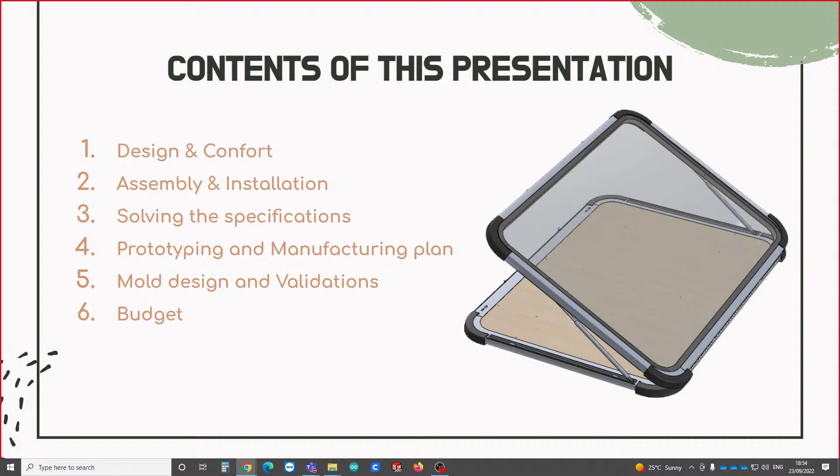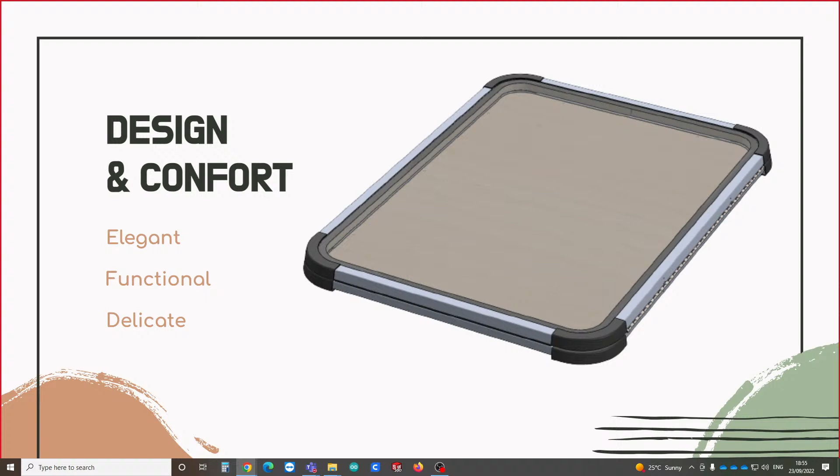Hello, our product is ideal for roof racks. It is adaptable to any roof rack as a standard anchorage has been used to allow it. As you can see, it has an elegant, functional and delicate design. When closed, it has the minimum height possible. It is a place where you can spend the night in unique getaways, enjoying the sky and the stars with your family or friends, wherever you want. It allows opening so that the breeze can be felt without allowing insects to enter, to get a safe rest in an extraordinary place.

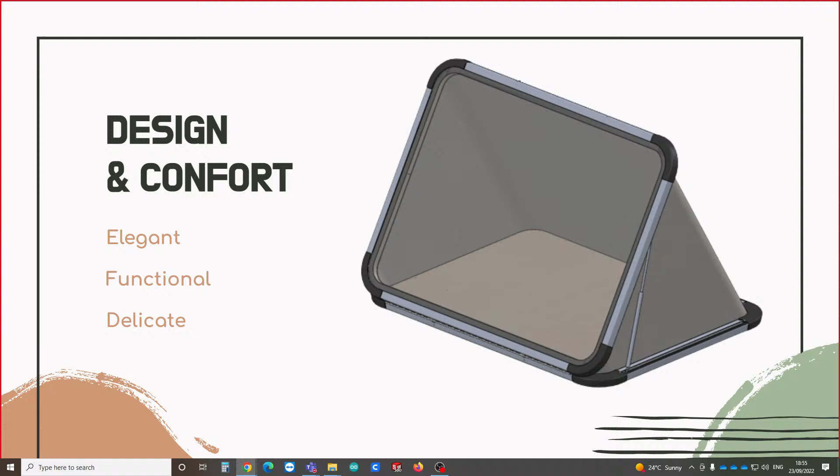It is designed mostly with aluminium to make it a lightweight product, with only 73 kilograms of weight, fabric to enable its small size and lightweight, and plastic for the corners. It also has water seals that close the product in its entirety to prevent the entry of external agents such as rain or anything which could damage the tent. We have made two identical frames to reduce costs and lead to mass production. It's a simple but decisive product that will accompany you in all your nomadic life. And now I will pass it to Sergio.

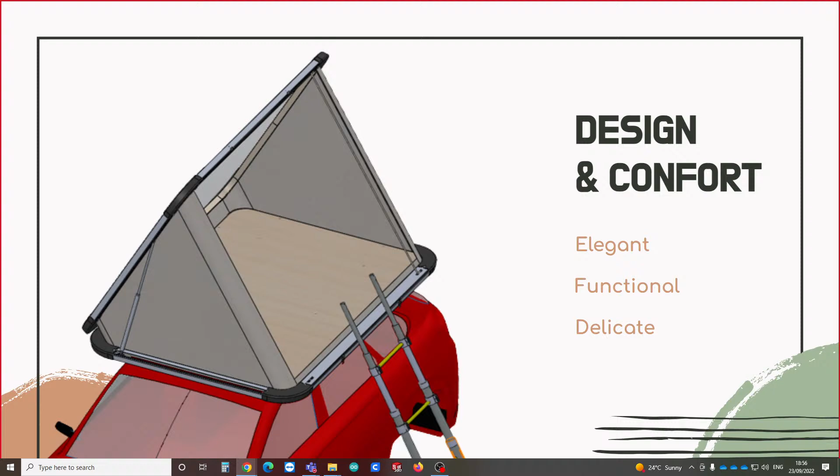Hi, I'm Sergio, and I'm going to present the assembly and installation. We want to present a design that is compact and conveys security to the user. Our product has been designed to be easy to install and easy to assemble.

The first level of assembly will be as follows. The structural bars are attached to the floor panel by screw and nut set. For installation on the car rack, the adjustable support must be attached to the bar before welding.

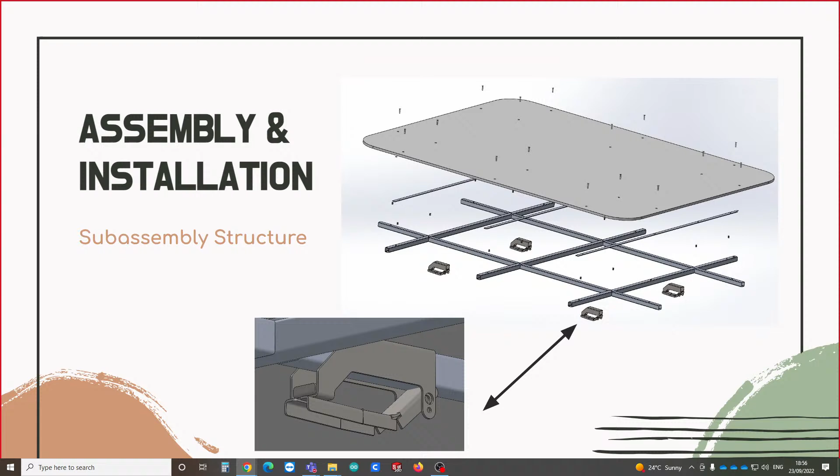The next step will be to attach the 4-folded sheet metal frame to the previous subassembly by welding. Once the metal frame is installed, the 4 plastic corners are installed with screw and nuts. For insulation, the weather strips are sealed to the metal frame. The plywood carpet is sealed to the floor panel by polyurethane foam.

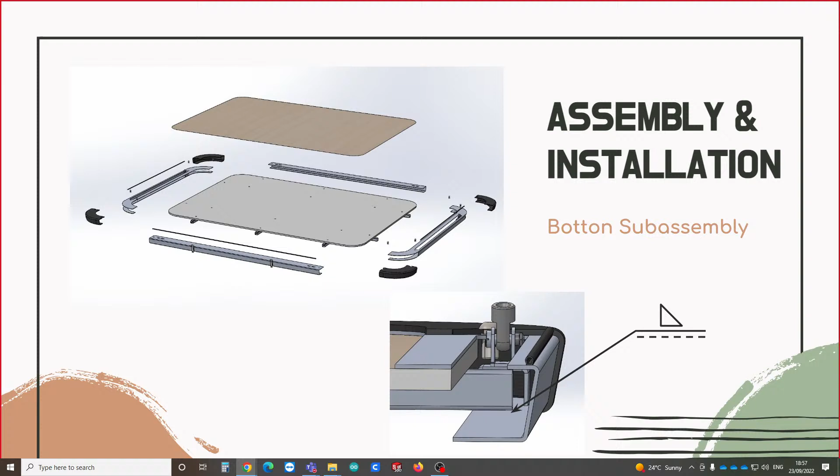The subassembly metal frame ceiling is easy to assemble. The screen is sealed with polyurethane foam to the 4 metal frames. The spring-based supports are welded to the frame on the inside.

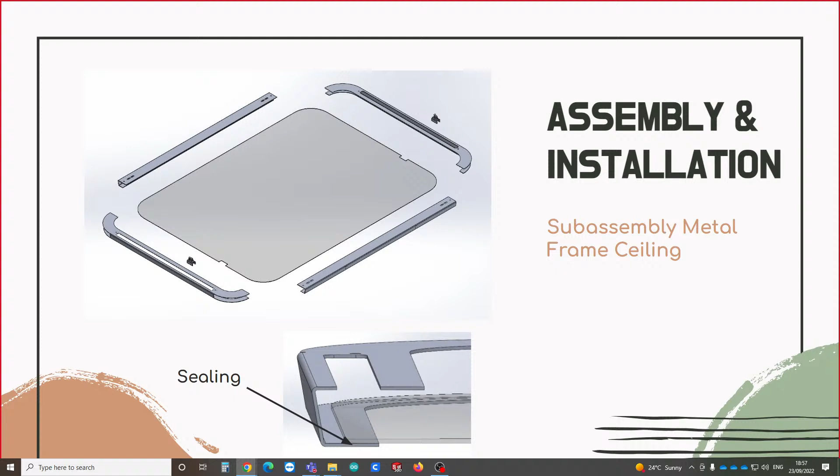4 plastic corners with screw and nuts are attached to the previous subassembly. On the other hand, polyurethane foam is inserted into the hole of the frame, and the weather strips are sealed to their surface for the insulation of the living space. 2 plywood sheets are used to seal the inside of the window.

To connect the top and bottom subassembly, a hinge is welded to both frames, and 2 gas springs are installed in the pre-welded bases.

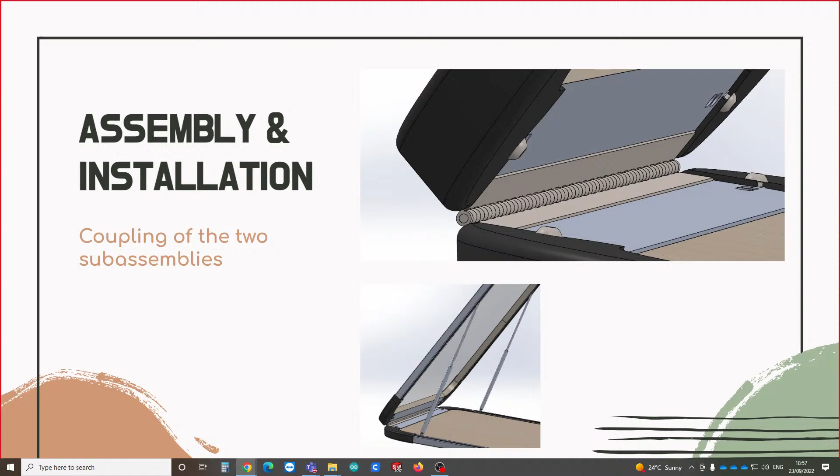Regarding the installation to the car, our design offers a great adjustment to the different roof racks, thanks to the easy manipulation of the support. And now Jose is going to continue with the presentation.

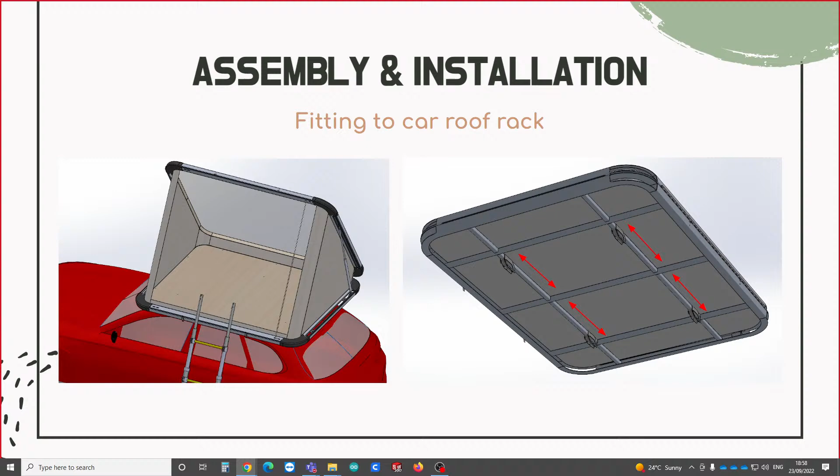Hi, my name is Jose Angel. In this section, we have to stop to differentiate between these 2 aspects. In fact, both are relevant for the industrialization of any product.

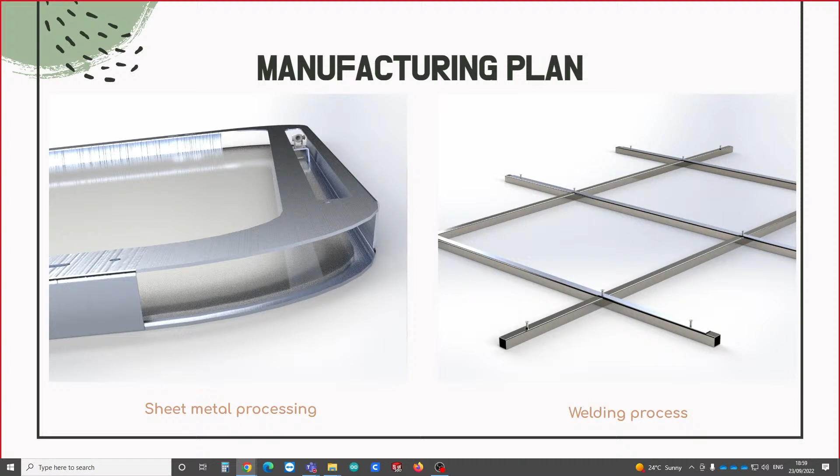Talking about the manufacturing plan, we have to point out that the main limitation of the project was the weight in running order, which had to be less than 75 kilograms. So the material we had to use was very light. In order to provide this material with the necessary robustness, we have firstly used manufacturing processes such as sheet metal, weldments, and on the other hand, assemblies that provide perfect rigidity and safety to each element.

Of the rest of the part design, we can highlight the parts manufactured by injection molding process, and the part that had been designed for CNC cutting.

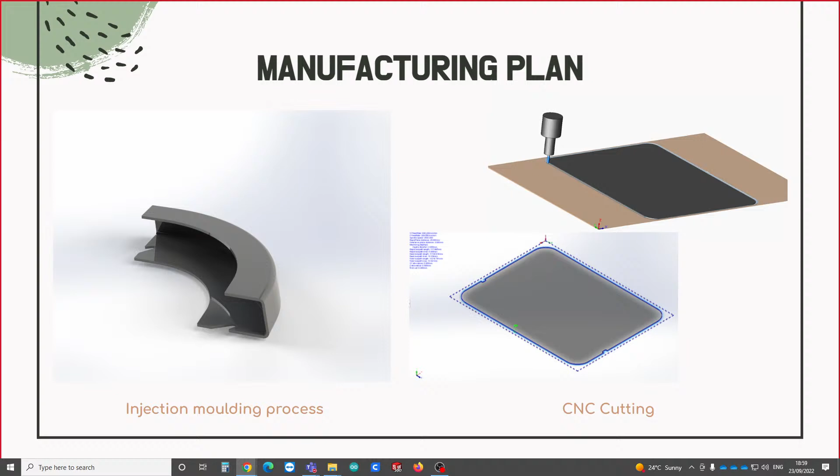We were required to produce a fully functional prototype, and this was a determining factor in the choice of scale and the processes used to manufacture it. As a result, we have chosen the scale 1:5, so that is as close as possible to the final product.

Thanks to redesign of the parts, we have achieved the right thickness of the parts and a good coupling between them. For all these reasons, we believe that we have passed the target of the total functionality of the prototype.

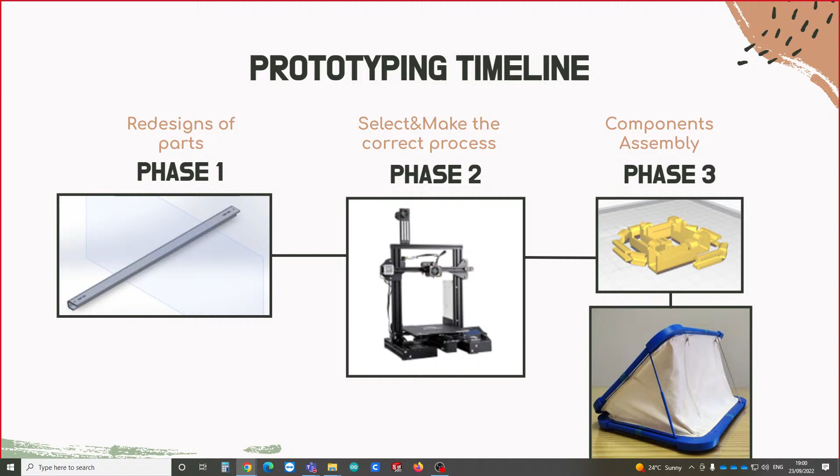Regarding our plastic part, we decided it has to be small and simple in order to have a mold that does not have huge dimensions. Its thickness is 4.5 millimeters and it is made of PP copolymer, as well as the car's bumper.

We can see a short video where the injection plastic filled perfectly, and there is no problem with the design. There is another image here where we can see some spots, some dots, where there are some air entrapments, but we expect that because there are some curves that we cannot avoid.

But it is really easy to design, to make it affordable. I think that's pretty much it for this part.

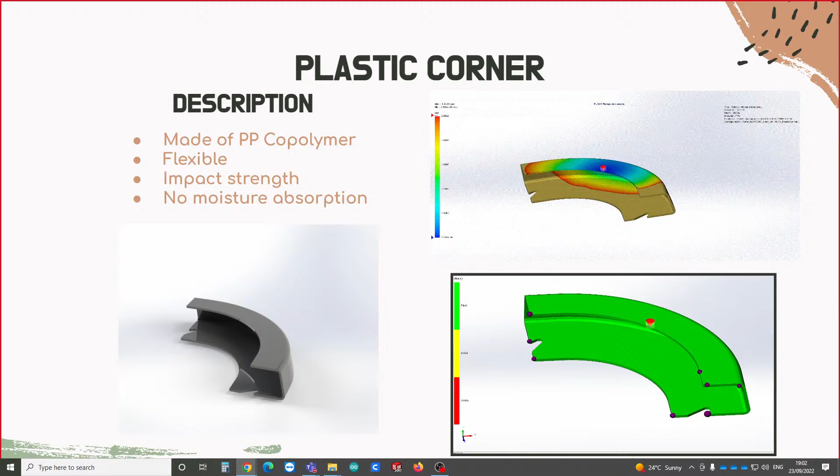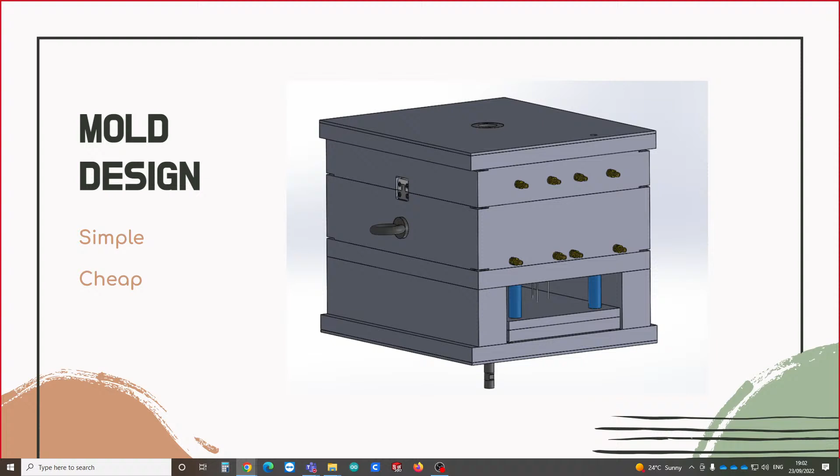We look for a simple and cheap mold, so we focus on the plastic part design, minimizing undercuts to avoid side action slides. We choose a two-plate mold configuration with two cavities. We designed an ejector layout to eject the part easily, minimizing witness marks.

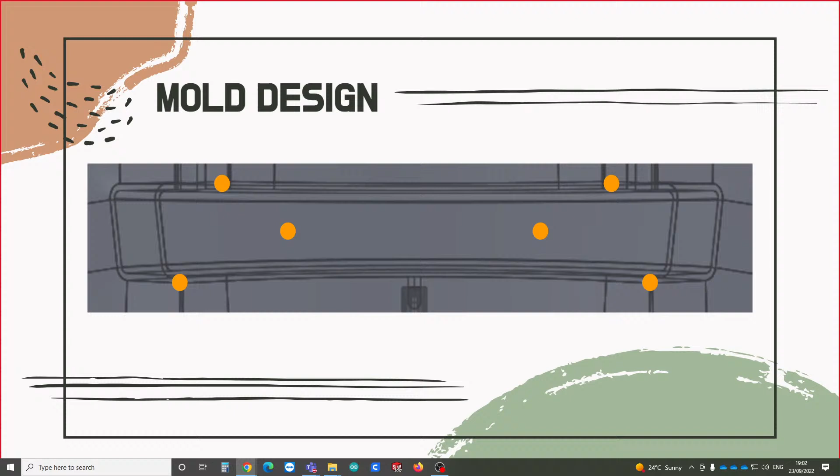For the injection gate, we designed naturally balanced and full rounded runners to provide the most efficient flow. Also, we use a standard tunnel gate to make curved tunnel runners.

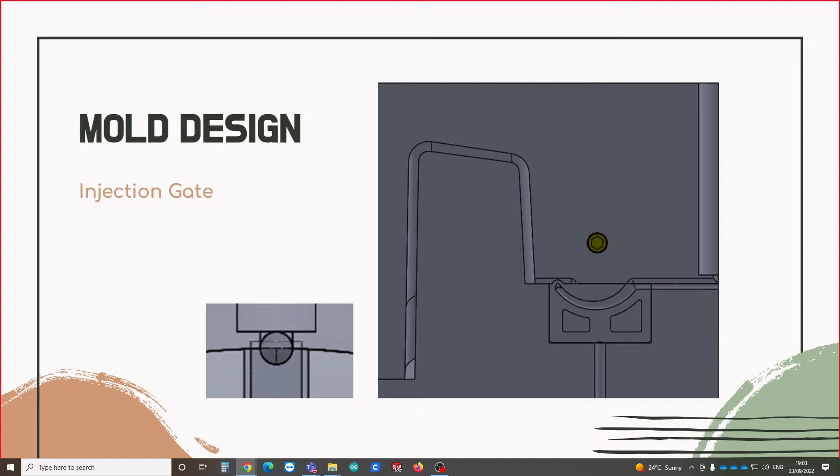Cooling lines are being arranged in multiple series to maintain a uniform coolant flow rate throughout the circuit.

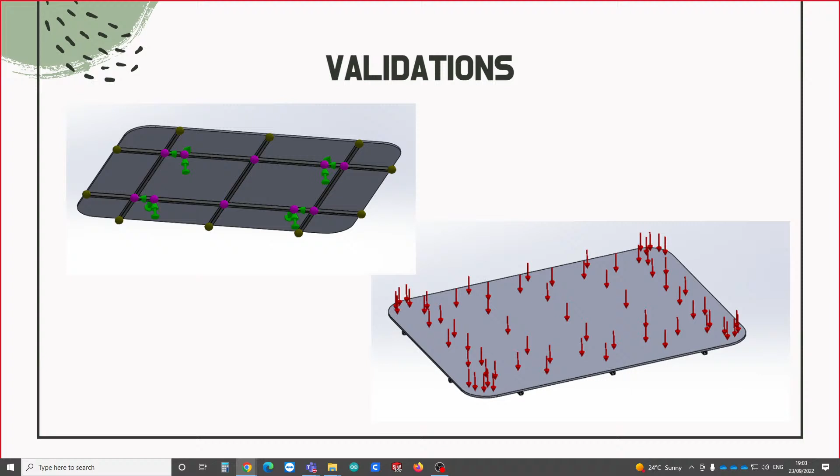To check the structure, we made a linear static analysis to calculate displacement, stress, and reaction forces. The members of the frames are being treated as beams, and the base is treated as solid. Anchors are defined as fixed geometry. Restraints and a force of 2,000 newtons has been defined as external load on the base panel. The displacement is low and the stress result is under the yield point.

And also, as we applied some DFM techniques during the design process, we have also been able to keep down the manufacturing costs.

Moreover, as soon as the customer wants to scale up the process, we have also quoted for a first batch of 250 units, which is a great number to start testing the market with. And we have calculated the unit price by applying only a 20% profit, which is a very basic price.

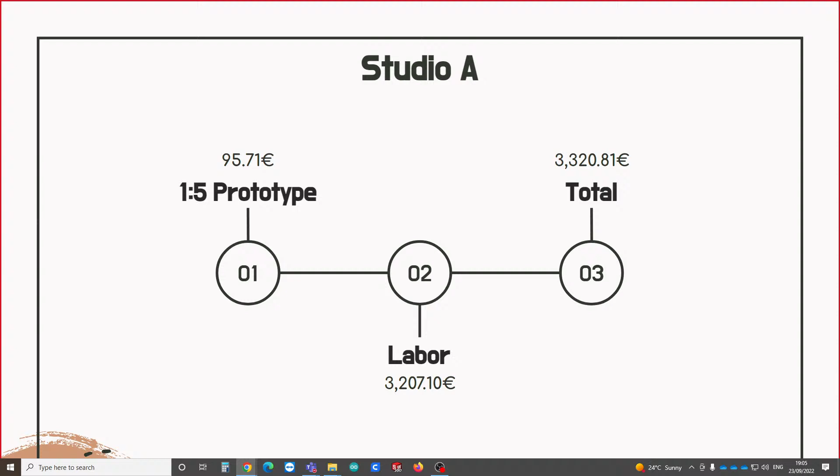And obviously, if you see the 2,880 euros that one unit would cost, there is a lot of room for also scaling up the profit. Moreover, as our take as a studio, we have been able to keep down the cost of the 1-to-5 scale prototype, and also, of course, accounting for the labor hours and so on, our total take would be 3,320 euros.

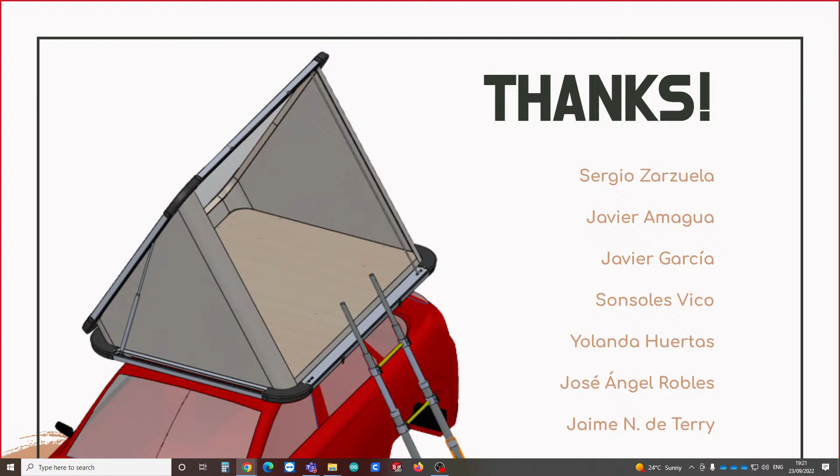Un gain, un profit de 20%, que es un profit base para sacarle rentabilidad, pero con ese precio hay posibilidad de escalar, de incrementar ese porcentaje, más del 20%. Vale, pero este es el precio de fabricación. Bueno, ese es el precio de venta, porque ese precio incluye el take, el 20%, y también el IVA. Ahí estaría el precio. O sea, este es el PVP, el precio de venta al público.

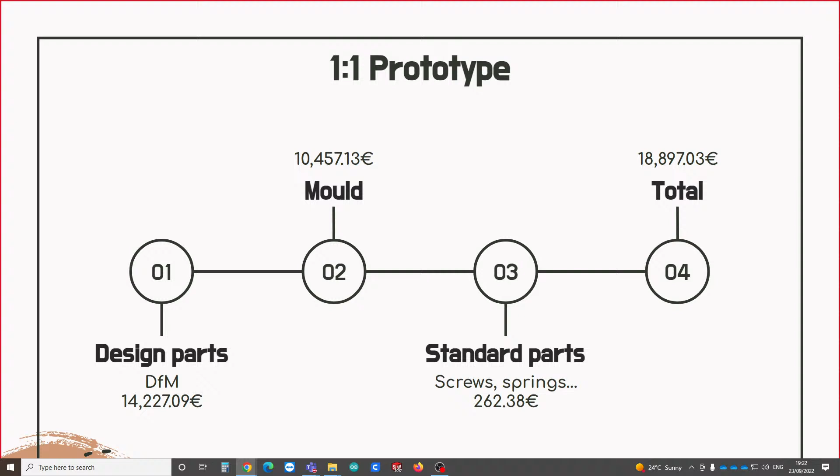Vale, ¿y el precio de fabricación cuál sería por unidad? El precio de fabricación por unidad, el del prototipo no es el precio de fabricación por unidad, evidentemente. Luego se reduce bastante, al industrial. Aquí está el precio de industrialización por 250 unidades, costeando. Entonces, si le quitas ese 20% que dice Jaime, y el IVA, te dará el precio de coste de lo que te cuesta a ti realmente fabricarlo.

Hemos hecho la proyección de la industrialización del modelo a esas 250 unidades. Evidentemente, si industrializas y haces una tirada de 500, el coste bajará y podrás venderlo más barato, según sea el deseo de la inversión. Pero el precio de fabricación, incluyendo las piezas estándar, serían 1.820 euros. Vale, pues gracias, chicos.

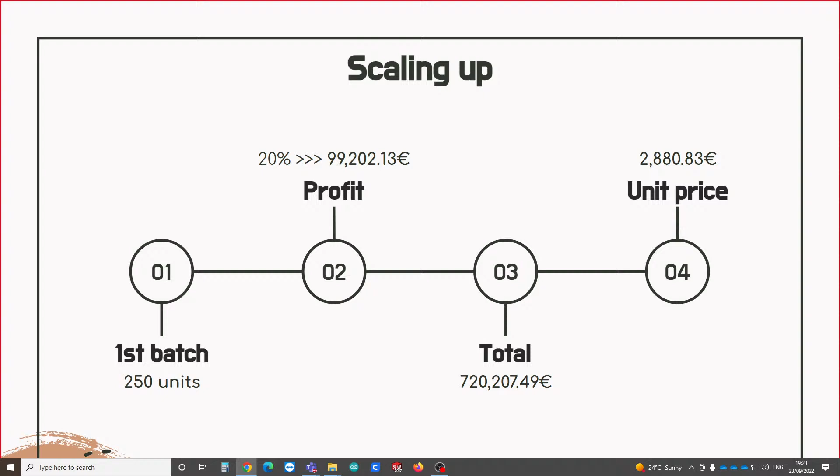Usa Google Drive. ¿Pendrive o Google Drive?

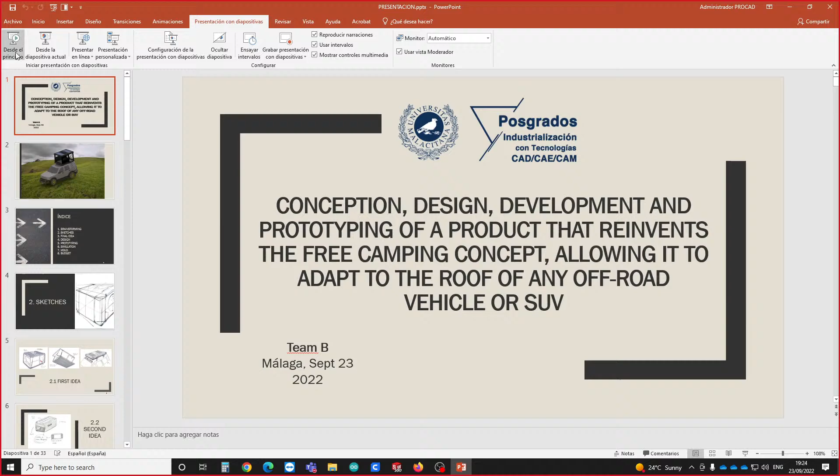Vale, sí. Nos verás seguramente, ahora me verás a mí. Sí, he encontrado, pero no veo el streaming en directo. ¿No se ve en directo? Ya se ha encontrado el canal, ¿no? Sí, You Make It, Fab Lab. Vale, está como en espera, espérate.

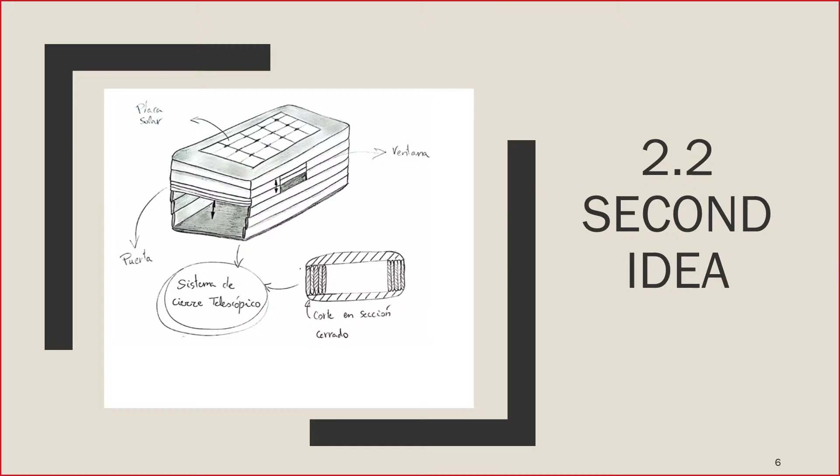The second idea has a telescopic opening system. For this system, the wall is formed by approximately 10 bands with the rectangular shape of the piece and a height of 12 centimeters, which are joined together. We discarded the second idea because it was more difficult to manufacture than the first idea.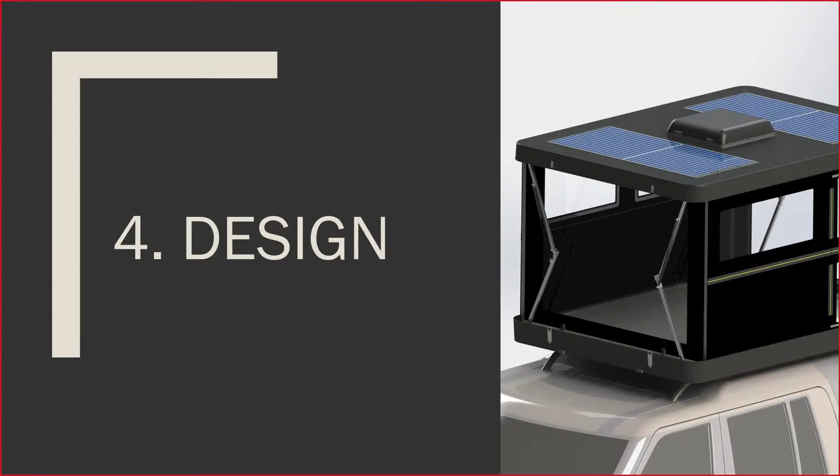This is the final idea, the render we can see here. And now we are going to explain the different parts.

Hello, my name is Daniel, and I'm going to explain the design that we chose, which only weighs 70 kilos. About the walls, they are made of 3mm thick carbon fiber panels joined together with carbon fiber hinges, which are attached to these panels by epoxy resin.

The openings for the windows are made by CNC, so it's very easy for manufacturing, and they are covered by the same system as conventional tents: waterproof fabric with a plastic zip to allow the user to open and close the windows.

About the rear and front walls, they are made of the same materials and they are attached to the ceiling by hinges. To ensure that the walls will remain in place when being inside, we have placed 2 clip fasteners that attach to the base of the tent.

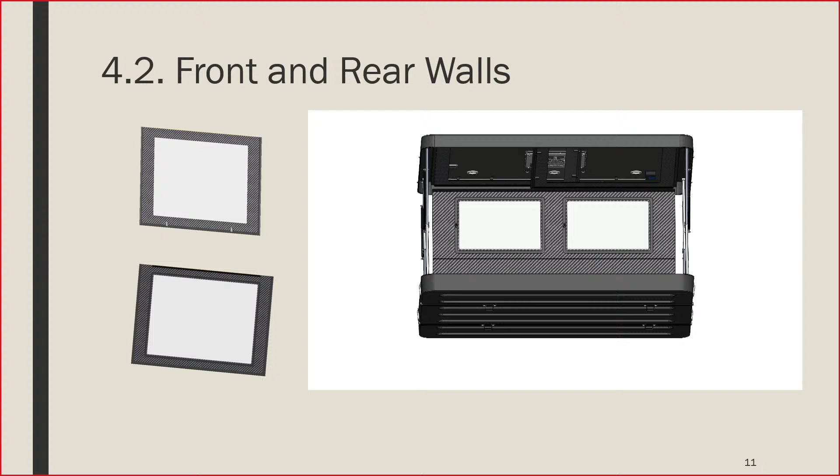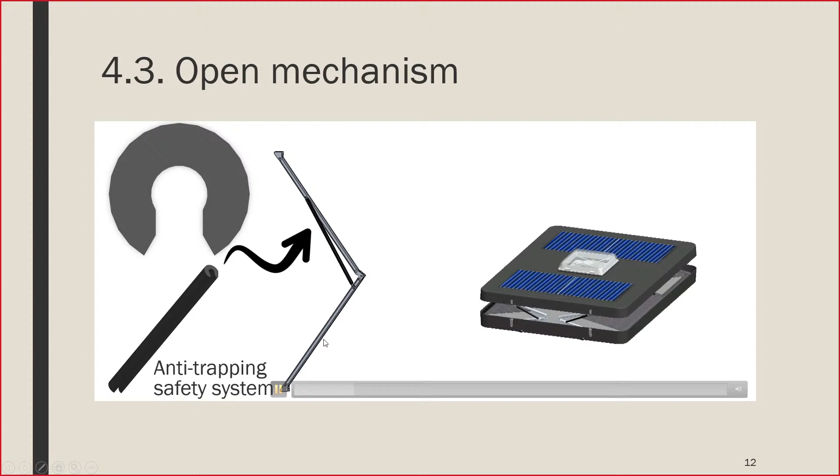About the opening mechanism, it consists of 2 aluminum beams with a gas damper to ease the opening of the tent. And to ensure security inside the tent, we have designed this injected piece that is placed right here, and it prevents the tent from closing when being inside.

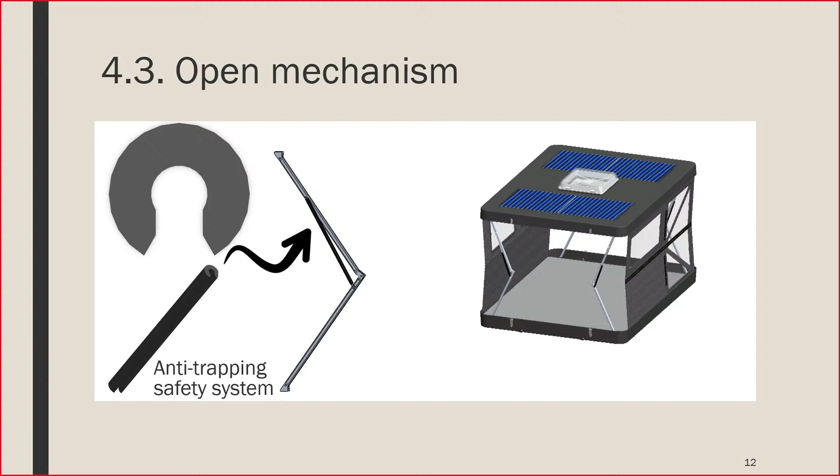I'm going to pass to Jose.

Hi, my name is Jose. I'm going to explain the final design of the roof. I can explain it in 2 parts, the interior and the exterior area.

In the exterior area, it's a skylight that is connected with the interior. This facilitates the entry of air and light.

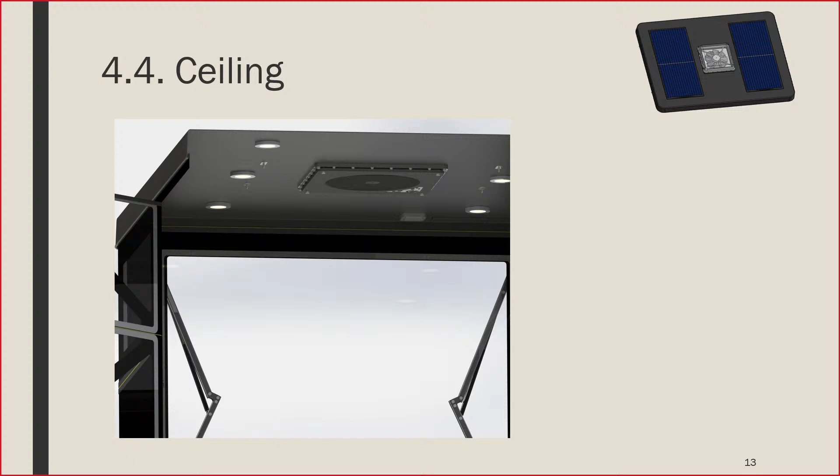The 2 solar panels will help reduce the electrical consumption that the car should provide for the LED light. The solar panels are operated by their own system. The energy is carried through an inside cable, and a small transformer will turn on/off the LED lights. An on-off button will perform the operation. I put a USB design on the button here to charge the mobile phone.

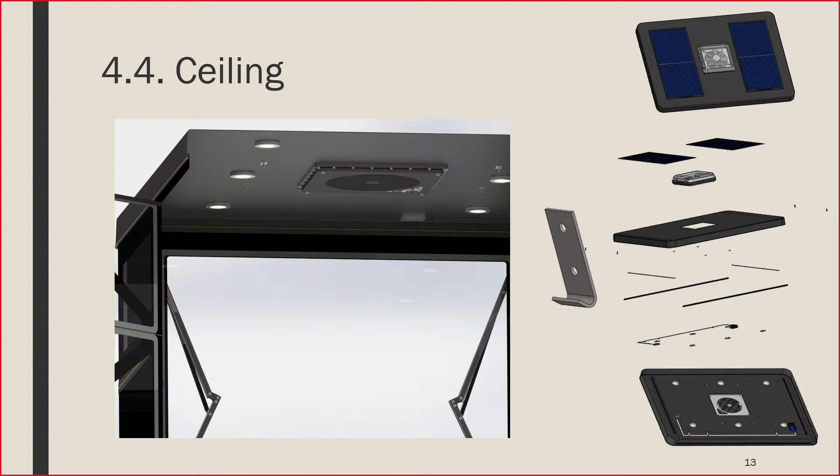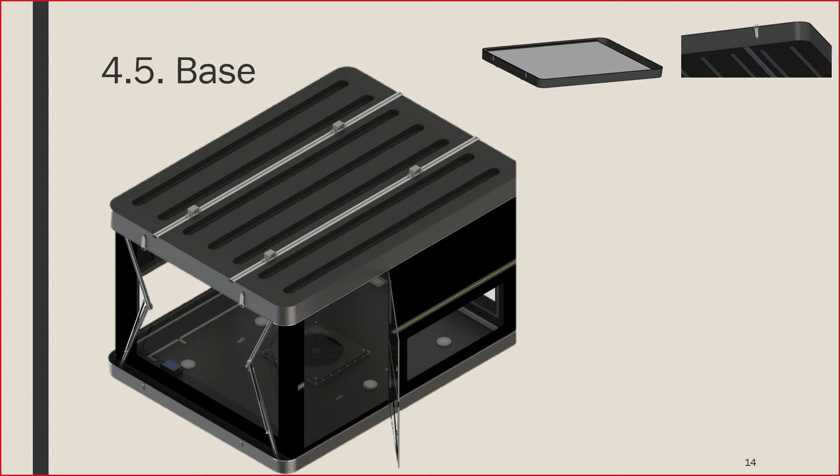Good afternoon, my name is Carlos and I'm going to talk about our prototype. Our prototype has been produced entirely with 3D printed parts. This is a 1/10 scale model.

By doing this, we can design all the pieces and produce them in our 3D printer beds, and that's how we reach a reliable replica. However, the wall thickness is wider compared to the 1:1 model. That would be so thin that the printer couldn't reach to manufacture it. It would be like a paper sheet.

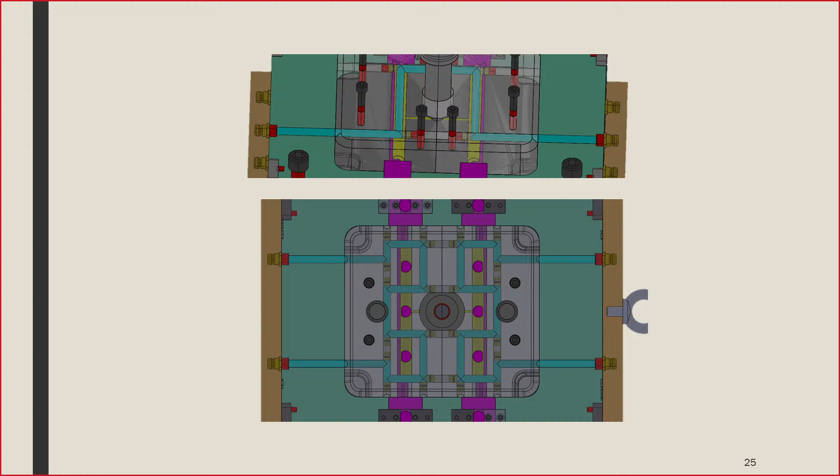The cooling is in zigzag form in the core and cavity plates. The entrance and exit of water are lateral. Each piece needs 3 ejectors, 6 in total for the mold assembly. And in this mold assembly, there are other similar components, like centering rings, counter or cycle counters, or centerings.

Hi, I'm Elena, and I'm going to describe the budget of our project. First of all, we must specify that we have divided the budget into 3 categories.

First, the engineering budget. It refers to expenses generated by the engineer service, software license, computer equipment, and all machinery used. Of the latter, only 5% of the total price is taken into account since they aren't resources made for this project alone. The total of this budget amounts to this price.

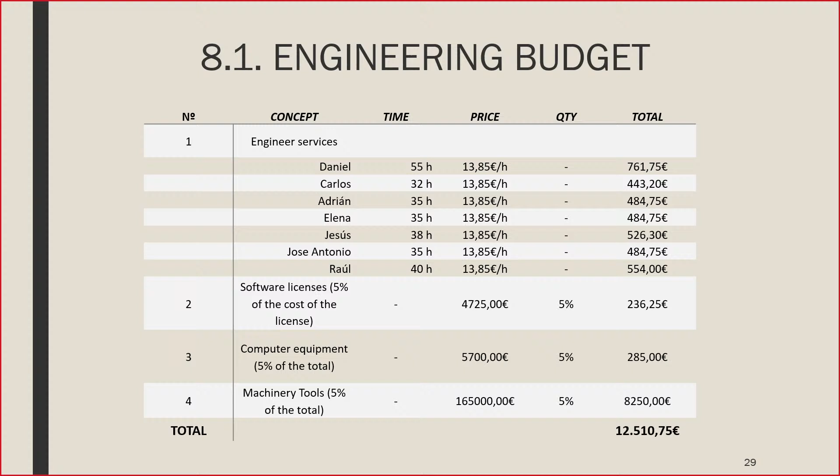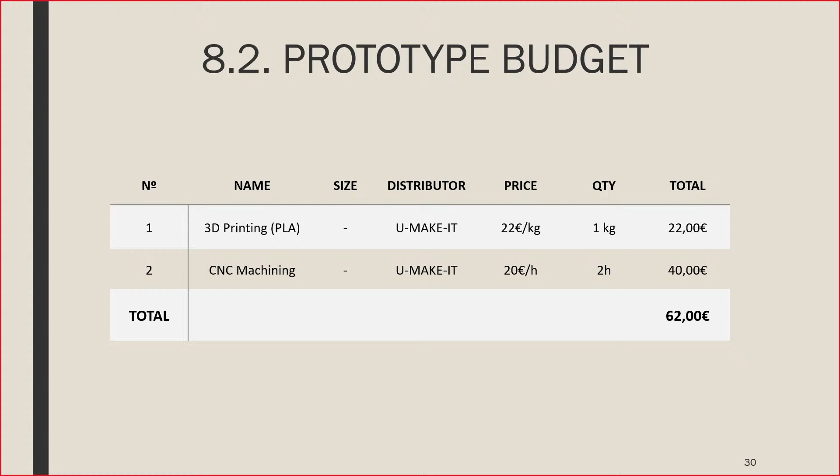Secondly, we have the prototype budget. This refers to the prototype that we are presenting today, and it only includes the 3D printing cost and the CNC cost. Finally, we have the estimated budget for the manufacture of a functional prototype.

For this budget, all the components used in the manufacturing have been taken into account. As we can see, the total price amounts to 7,500 euros approximately.

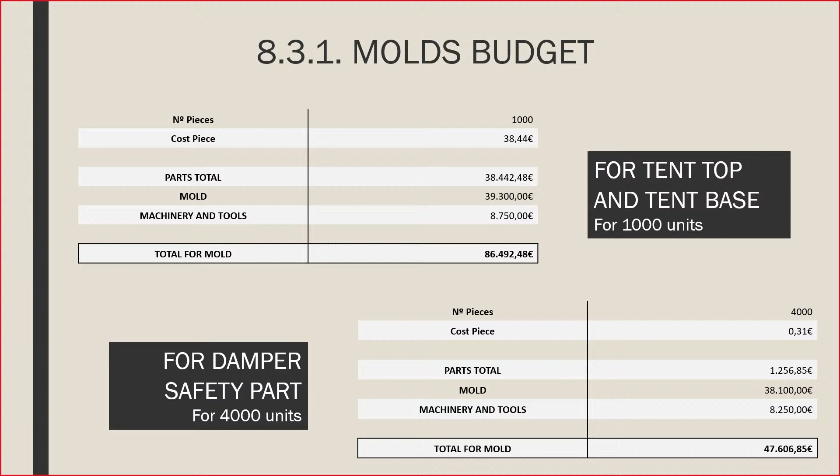On the other hand, the budget for the molds of the top cover, base, and damper safety part has been made separately because it will only be an initial investment. These are the prices for each of the molds, assuming production of 1,000 prototypes. And this has been all about the project budget. Thank you so much for your attention, and we hope you like it.

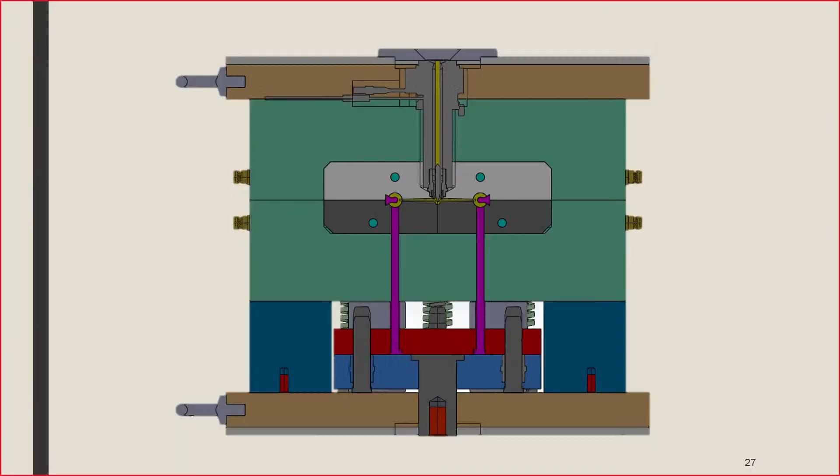Okay, I'm gonna start. It's the same question as the other group. The ladder part is included in the price. Where does it get stored? Inside the car, as the battery. This was one of the requirements of the customer.

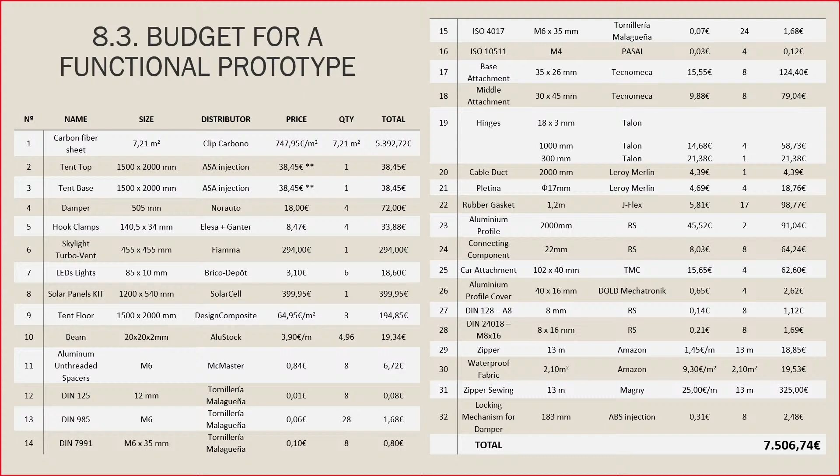And you need a mold to make it. I see in a picture in the first one of the presentation, 2 bars, 2 crossbars to put your tent over. No, 4.3. But you have the connectors too. You mean this mechanism? No, it's the bars. The crossbars are on the top of the car.

Before, you mean after? No, after. Near the beginning? No, yes, in the beginning, I think it's the first one. Maybe the sketches, or no? The sketches, this one, the third one. You have 2 crossbars over the roof.

Yes, it's necessary to put your product. If you look at any car, you need that standard rack to place anything. But there are some cars who have a place to put your product if you want, like Team B. Team A, sorry, they don't need something like that. Our model requires this type of rack.

Because it allows more flexibility. Yeah, you can see here. You can see it there. Then you don't need it? No, you just need a transversal bar or profile to attach it to.

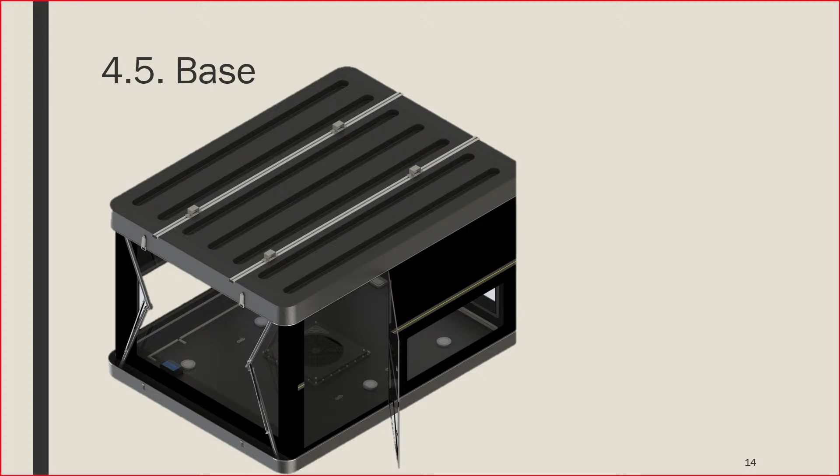And one of the first pictures you have there, the design is more rounded in front. Is this the final design that you're looking for? Not necessarily, like this one right here, the third. Yeah, this is like one of the first sketches. So, okay, the last one is this. This is the last, same.

Close it. What's the size of the base? 2 meters by 1.5.

So how many people can fit in there? It's like the usable space. It's like a king size bed.

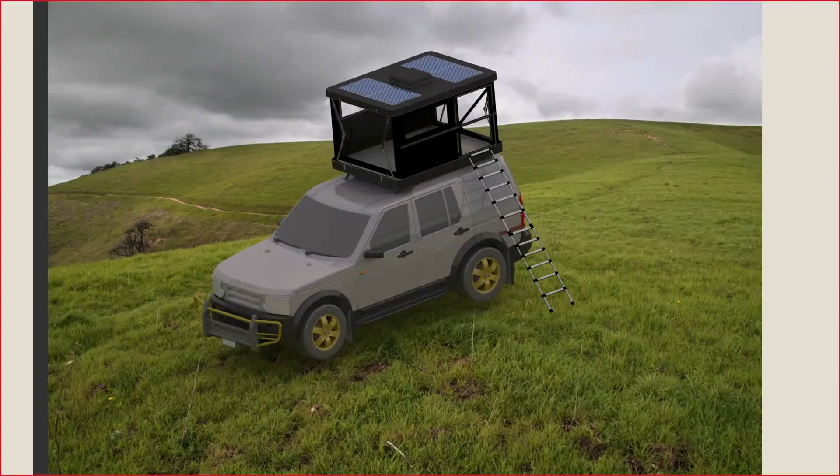Is there a mattress in there? Is there something like, the same question I asked them? Yeah, is there something? We have this base that is placed, I will show you guys. Because this is made of plastic, it has these cavities to strengthen the structure. So you cannot see the cavities, so we place 2 coats of foam.

That can be included in the prices. Yes, the prototype cannot be, it needs to be with the final version. My question is, this final price of 7,500, does that include the foam as well, or is that separate? Someone has to think about it. The foam wasn't included because the customer didn't want it. So the customer prefers to leave all the weight to the structural part and leave the comfort to something like a normal sleeping bag, for example.

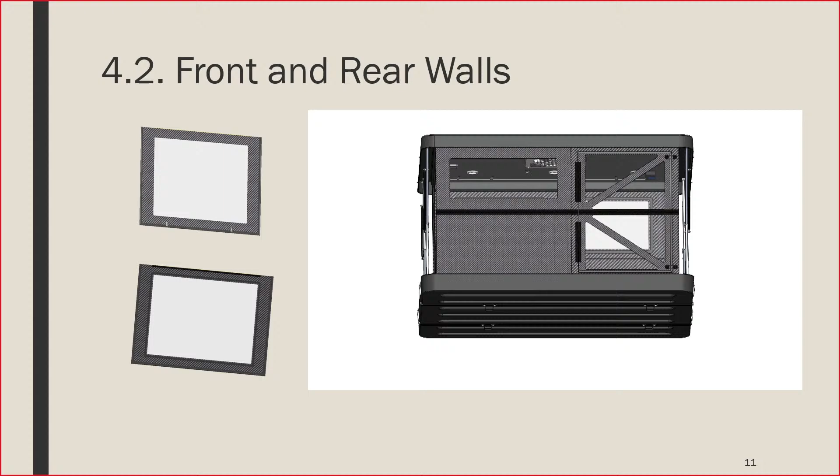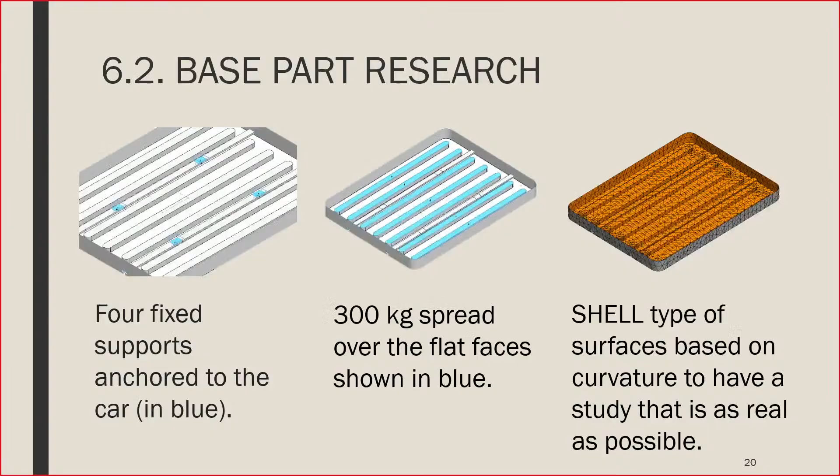My last question is about the simulation part. You mentioned in the base part research that some parts have problems because they show red. Is there a problem with that red part breaking? No, because in the safety simulation it's okay.

The safety factor is about 1.8. The most unfavorable point is there, in the security rating. But we simulated with about 300 kilos, so it accounts for two big people.

If you sit on it, will those parts come through? No, that's in a normal situation. Okay, that's enough.

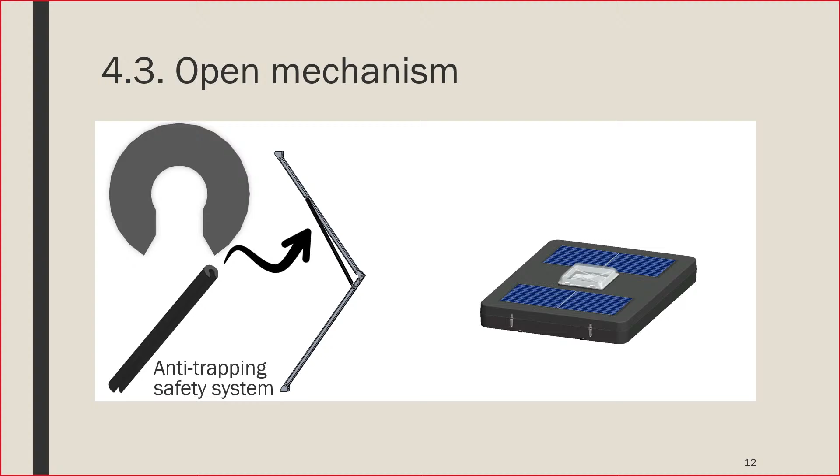Change the way it opens up. Yeah, but if we did that, the closure mechanism, the profile mechanism, wouldn't fit. Yeah, that's what I'm asking. So we prefer to do it that way and have more space inside the tent for the people instead of making it more aerodynamic, but you have to be like, I don't know, 170 or 180 centimeters inside.

But the fuel is expensive now. You can think about that. Yeah, but this is a premium product, so this is not supposed to be on a highway all the time. So it's for a mountain.